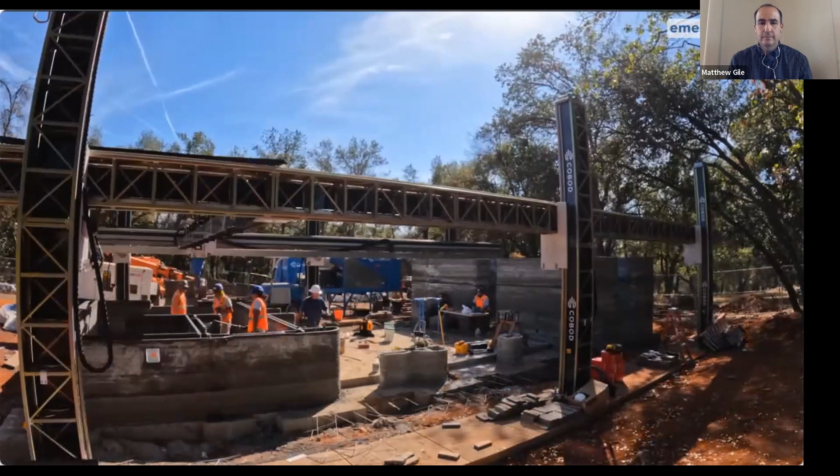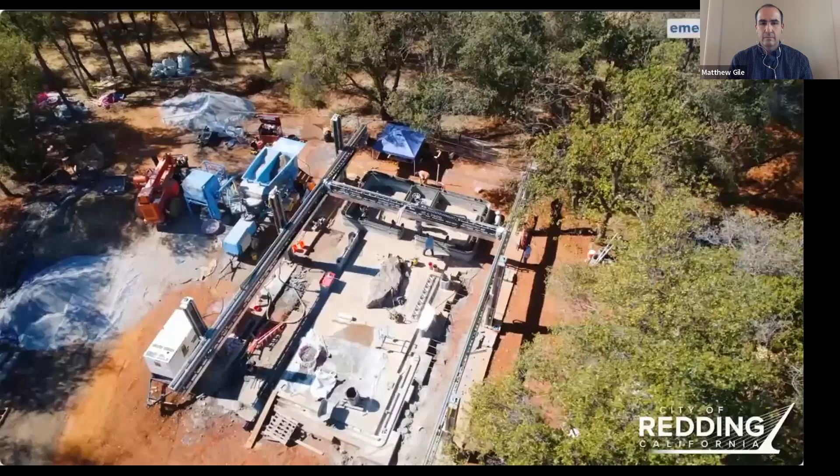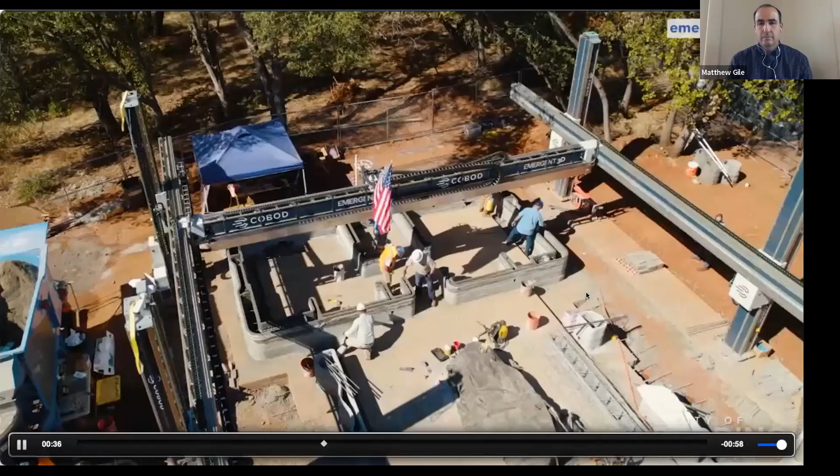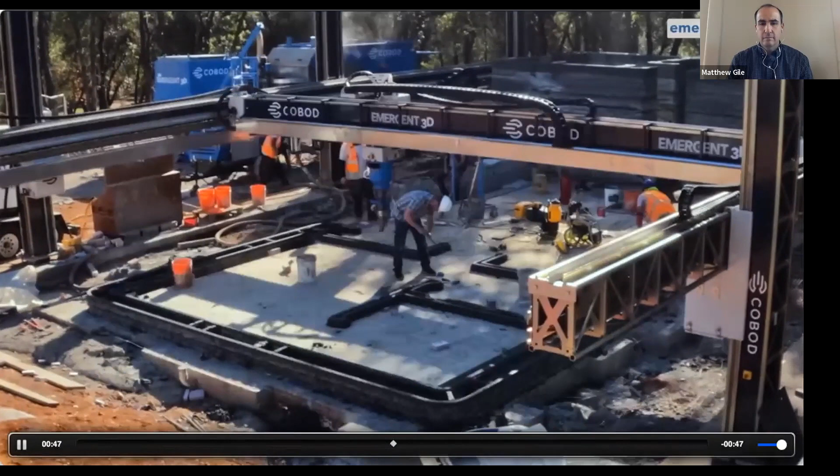I'm Matthew Gile. I'm the founder and chief visionary officer for Emergent 3D. Here is the culmination of 3 years of work. It's a site-built 3D printed house. And so this is the first in the state of California. 3D printing allows us to build these beautiful organic shapes and do it in a very affordable way. It's an opportunity to look at technology coming to everyday life. We're providing affordable housing for our community members. What community wouldn't want to be the first at building something that would benefit community members in such a real and concrete way? These houses will be marketed for families that are income qualified.

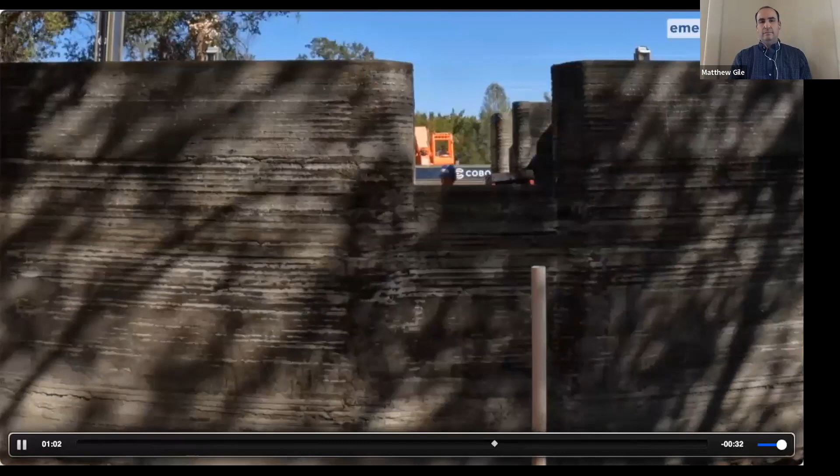How we can build a structure faster. That's one of the main advantages of the technology. You can basically customize your house the way you want it. We've got a $50 to $60 million capital expenditure program over the next 10 years. We are planning to put 50 to 60 of these printers to work all over the North State and the U.S. It's exciting, it's the new ways in building technology.

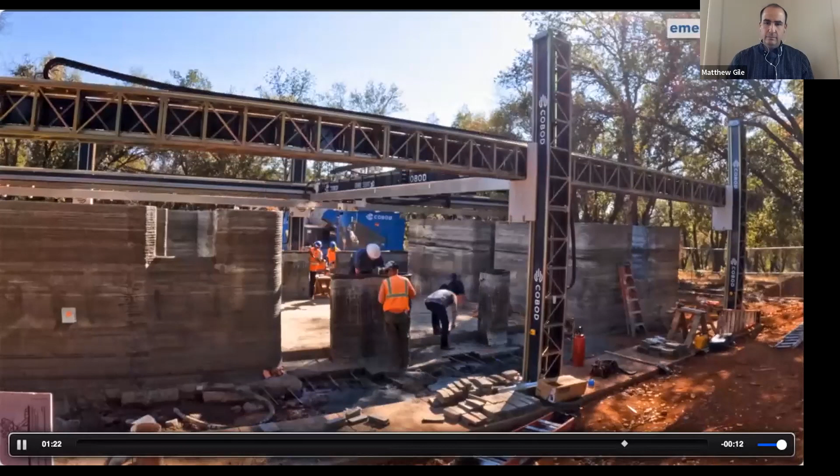So I know that I'm probably preaching to the choir here, but some of the main problems that we're facing in our housing crisis, and especially here in California, is our low supply of construction labor. One stat we like to share is for every 5 within the construction trades that are retiring, only 1 is coming in. So we are going to have by 2030 an 80% shortfall in our trained construction labor. And so this is a multi-decade crisis in the making.

And so automated construction robotics is going to be one of the solutions to help shore up that massive shortage in labor. Also, the cost of construction is an obvious one. And then within the workforce affordable housing sector, the cost savings versus the aesthetic design dilemma. With 3D printing, we truly can have on the design side our cake and eat it too. We don't have to forego a nice design to make it more cost effective.

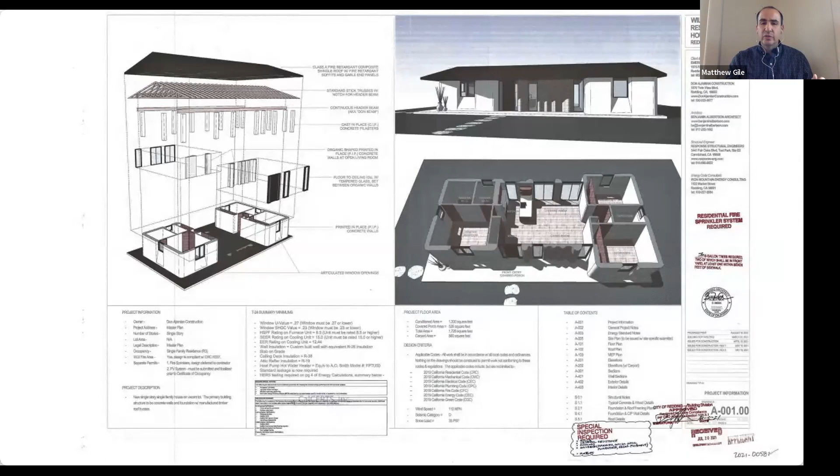What you're seeing here is what we've dubbed our wildfire restoration house. Originally, this was designed to address the Carr Fire recovery effort, and hence the name. It's a 1,200 square foot, 3-bedroom, 2-bath. You can see the coveted red stamp there in the lower right-hand corner. This is the first on-site 3D printed house design to be approved in the state of California. And then also the result, we printed the first on-site 3D printed house in California.

In partnership with the city of Redding and Access Home, the housing nonprofit, we are going to be printing a total of 6 of these homes here in Redding, and we have completed 4. And if it weren't for the atmospheric rivers that have been barraging our state, we would have already printed those, and these are moving forward with construction.

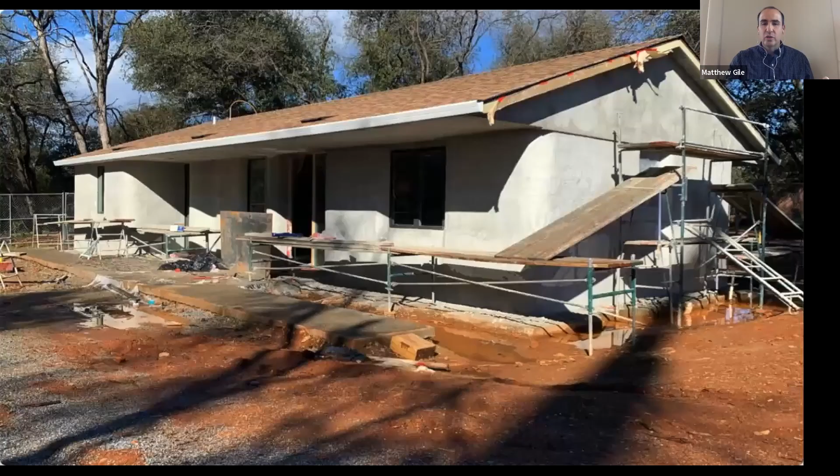This is the first one. This is in one of our parks called Enterprise Park for the city of Redding. This is going to be used for a park host. And so the city of Redding is providing subsidized housing for this caretaker to be on site, close the gate at night, and help the Parks and Rec services. And so this is, again, the first completed on-site 3D printed house in the state of California. And these are fresh off the presses, these images. Ben and I just went and took these pictures as of yesterday. And so it is rapidly nearing completion.

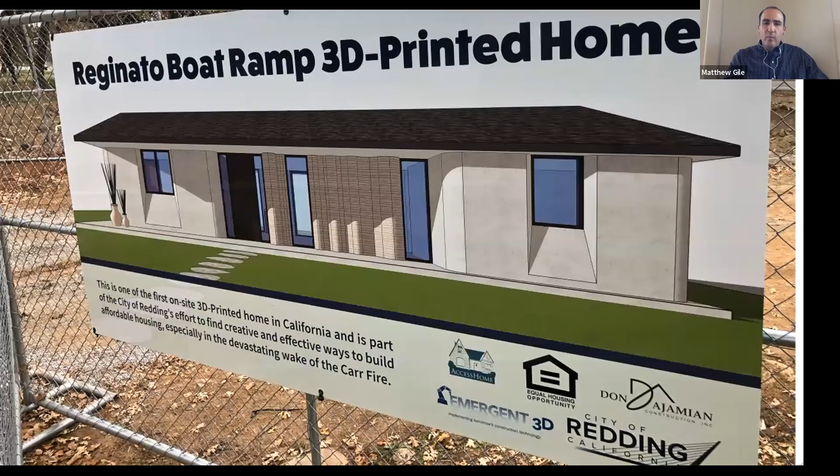This is the second one in another park here in Redding. The use case is going to be the same for a park host home. And this gives you a look at the stratified look before, on the other one where we did a skim coat, because finishes are incredibly important to us, and we want these to be desirable, livable homes. But just to kind of give you a snapshot of before that layer goes on.

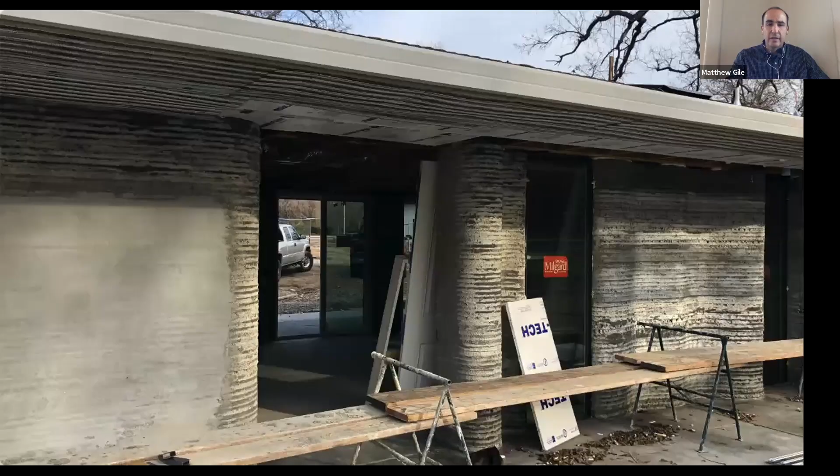And we had the honor to be able to print the first project in Los Angeles for the Woodbury University School of Architecture for their Department of Energy Solar Decathlon project. I think if I remember correctly, in the competition, there were about 20 universities competing, and Woodbury University won that competition. The premise was a net zero home, and their design was the only 3D printed design in the competition.

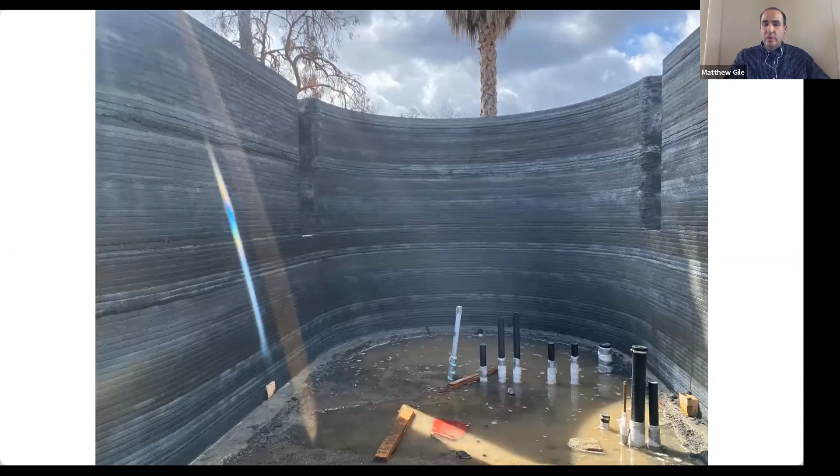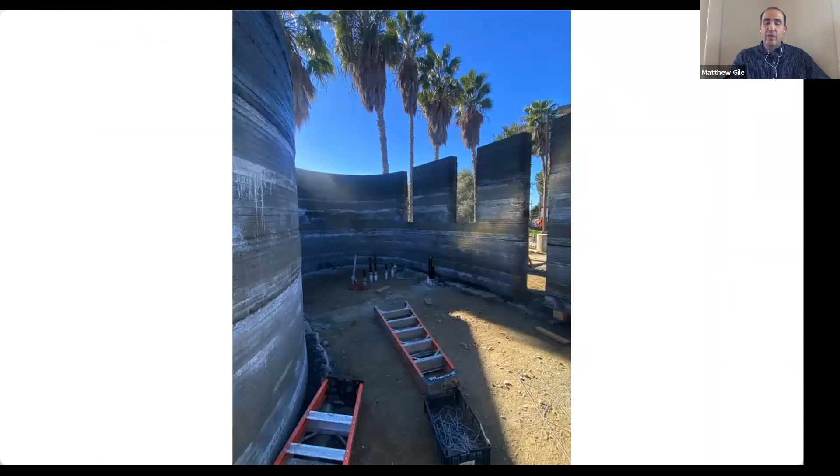And we went down, took our printer and printed it in 3 days. So it was a wonderful project to be a part of. And they are moving forward with construction, and I think they should be done with it in the next month or so. But just to kind of give you a look at the design there.

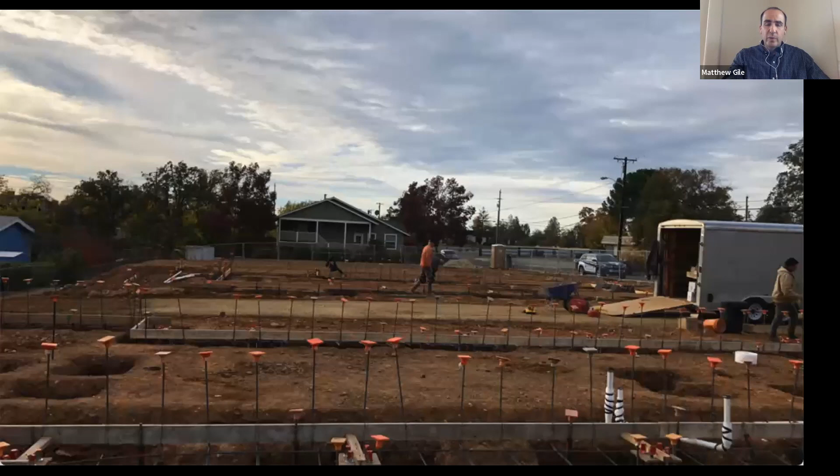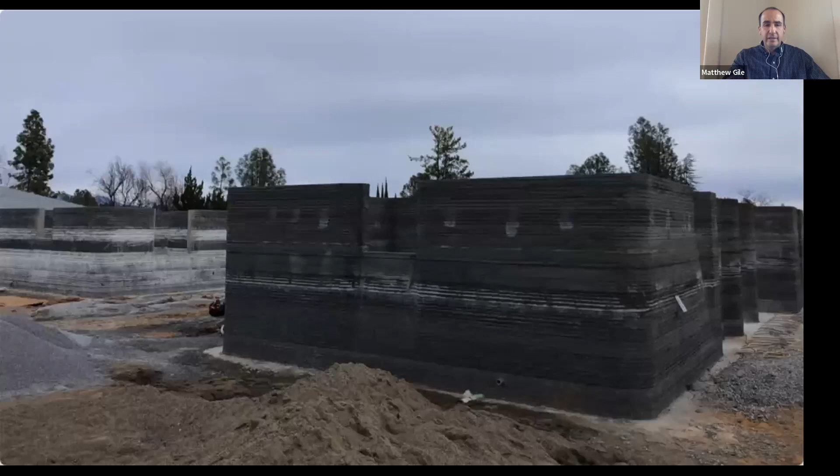Also here in Redding, this is in an affordable housing neighborhood. These are going to be 4 right in a row. And we have printed 2 of the 4 in this neighborhood. And again, if it weren't for the atmospheric rivers, we would have completed these 4. And so our company has moved out of the proof of concept phase and squarely into a full production phase.

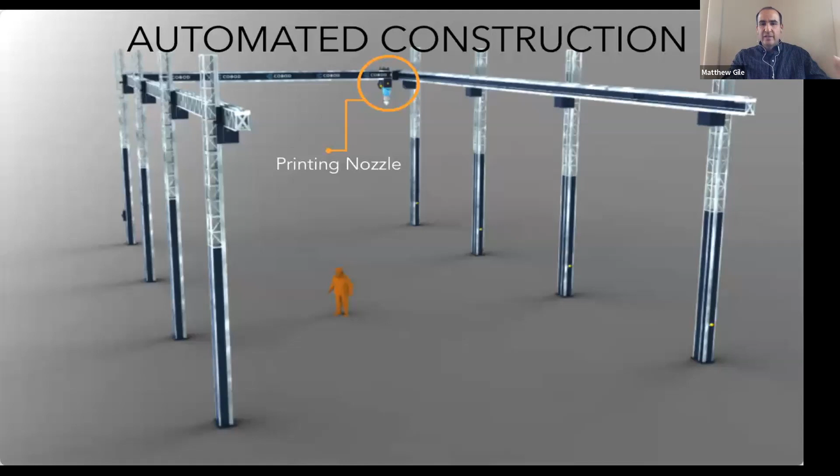Here's a look at the 3D printer itself at scale. This one in particular is a little bit larger than ours, but to give you an idea of it, we can print up to a 3,000 square foot single story with 1 setting, or a 6,000 square foot 2-story building with 1 setting of the printer. We can, as Ben will take us through, obviously print larger buildings, but with 1 setting.

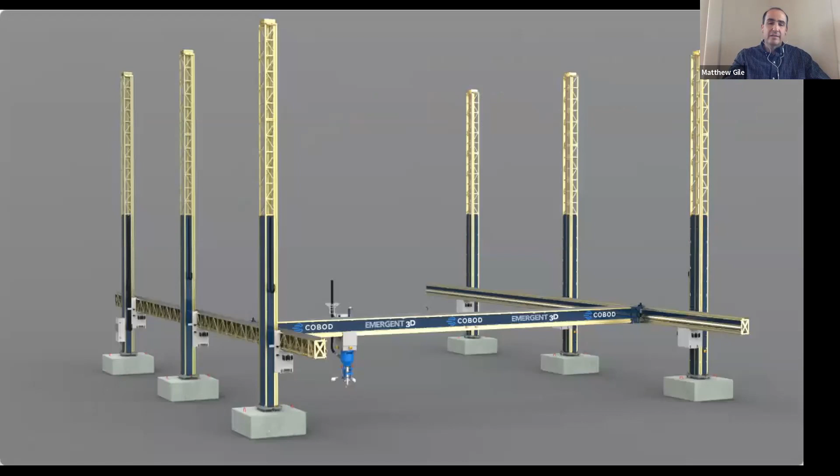That's the max print size of our printer, and this is the exact printer here. It is a modular system, so it can be scaled up or scaled down to match the scope and size of the project in the site. So that's one of the beauties of this technology, is that we're able to print on site and out in the field. We're not printing in a factory setting.

One of the important points for that is it has been identified by Freddie and Fannie as a site-built home, so our clients can get a traditional mortgage on it rather than it going into the modular or factory-built lending category. And then also State Farm has approved our 3D printed homes for their insurance policies, which is wonderful. So we're hoping to get many more insurance companies to recognize it, so that we can bring down the premiums for our clients.

And I'll just race through here. It brings a solution to the cost of construction because as long as we don't wrap the walls in stucco or in drywall, we save on that time and material. And we're batching right there on site. And also with our low supply of construction labor, it's attracting a younger generation because it's a tech construction job. And so we're really excited to be able to help in that regard.

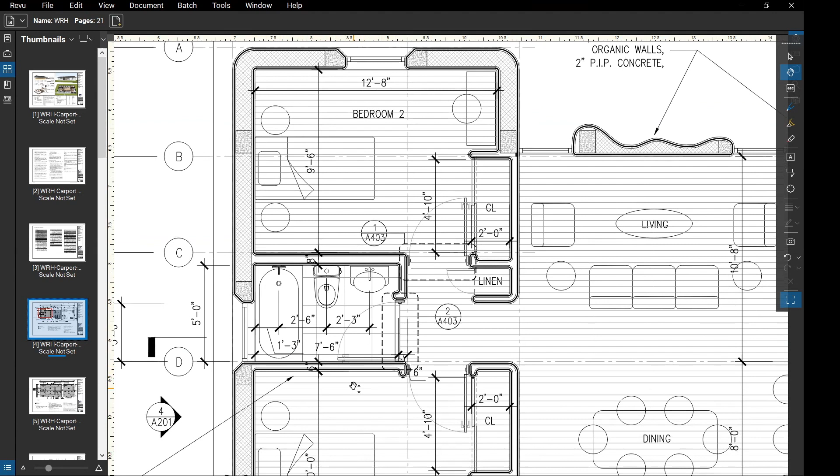Then as we go into the interior, we have just a typical 8-inch pipe shaft wall where we have plumbing, and then 6-inch walls for typical walls. And the printed wall is 2 inches thick. So you can see here that dark heavy line is the toolpath line. And I'll show you next our toolpath model that we create that then goes into the 3D printer.

And it's different if you have any experience with 3D printing. You have to create a volume in order for the 3D printer to print it. 3D concrete printing is different, where it reads a line. The toolpath wants to follow a path, essentially. So that black line is its path. And the thin line is the edge of the concrete. So you see the 2 inches.

So then at the 6-inch wall, we have a 2-inch cavity here with nothing inside because the wall can stand up by itself. We use simple wire bracing that is just laid down every few layers in order to tie the concrete together. Once the concrete sets for a few hours, it is super strong. It's not going anywhere. But just to make sure that the concrete doesn't move as it's getting layered, it's tied together with just simple metal wiring.

This is a little detail here at the door jamb, because when it prints, the tightest radius that we can do with the printer is 1 inch on the inside, and then again it's a 2-inch thick concrete element. So the outside curve is 3 inches. So we can't put a door jamb against that curve. So we made these little elements to have a flat portion to nail the door jamb to. The contractor liked that detail. It made it simpler for installation. And in the end, visually, it's kind of nice to have this accentuated door jamb or door threshold.

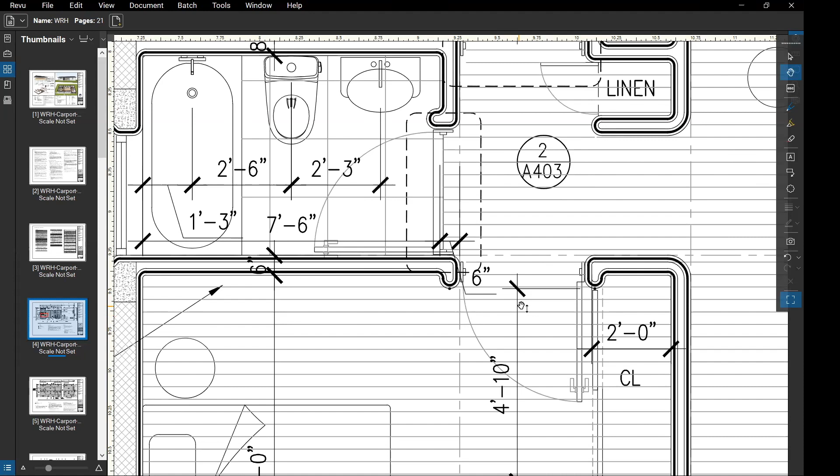I think I didn't mention it when we were looking at the 3D diagram, but in that 3D diagram from the beginning, these were the two white boxes on the sides where the bedrooms are, and then we have the organic walls in the middle. We did that to play with the printer and show off what it can do. But architecturally and contextually, we're building these in Redding, and if you've been to Redding, the trees here are really beautiful and distinctive. And now with the WUI requirements, where you can't really have trees so close to the house anymore, I thought it would be a nice detail to have these organic walls that reflect a grove of trees into the architectural design.

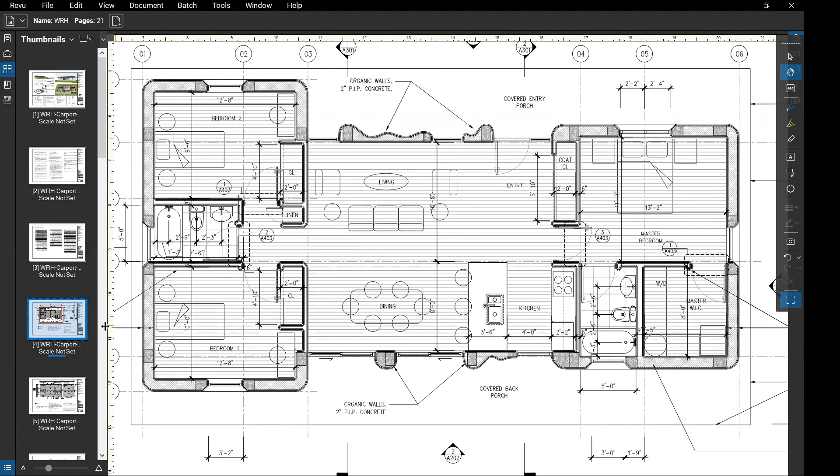The MEP drawing here, I wanted to point out because we get this question a lot. How do you do the outlets? How do you do the light switches? And in the end, it's quite simple. I'll show some construction photos at the end. They just set a box in as the printer is going along. They set a block out wherever there was going to be an outlet. And we played around with the idea, because you can control the 3D printer to stop at a certain point and then have a gap and then start again.

But the tediousness of that we felt was too much, and it was better just to have the guy on site be able to make that decision following the plan drawing, but be able to adjust it. So even though we're doing 3D printing, it's not replacing the workers on site. We still need the workers on site, the specialists, who know exactly where things need to go, and are able to work with the tool as part of the process.

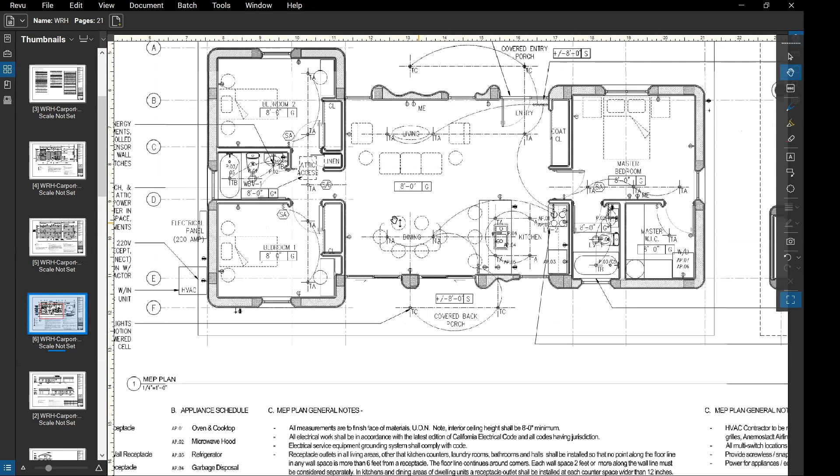And then it's just a typical drywall ceiling that's attached to the roof trusses, with downlights in that ceiling. So fairly simple. And then our typical elevations. We tried to push the envelope a little bit with our window detail, and we've got some photos to show that. We've got this 14-inch thick wall, and rather than having this big window sill and frame wrapping all the way around the window, we inset right here underneath the window and on the sides, so that we didn't need any additional windowsill. The window can sit right on top of the concrete and be attached top, bottom and sides.

And we learned through the process that because of the way the 3D printer works, when it prints, and you could see that in the photos and the videos, it's like squeezing out toothpaste. It kind of bulges out. It's not so clean and sharp, but you can use flaps on the side in order to get a really clean, sharp finish. And actually, the photos that Matt was showing from the Woodbury project, they used the flaps, and it turned out really nice and clean.

And we didn't use the flaps on the Wildfire Restoration House because of this window detail. So they've talked me into revising that window detail, because it's angled, the flaps would cut into the concrete as it's going along, and wouldn't look so nice. So in the end, we've just set the whole thing in. So rather than sloping up to meet the window, we just set it in here, so we can still achieve the same thing without needing the big windowsill. So it's all still a work in progress, and live and learn.

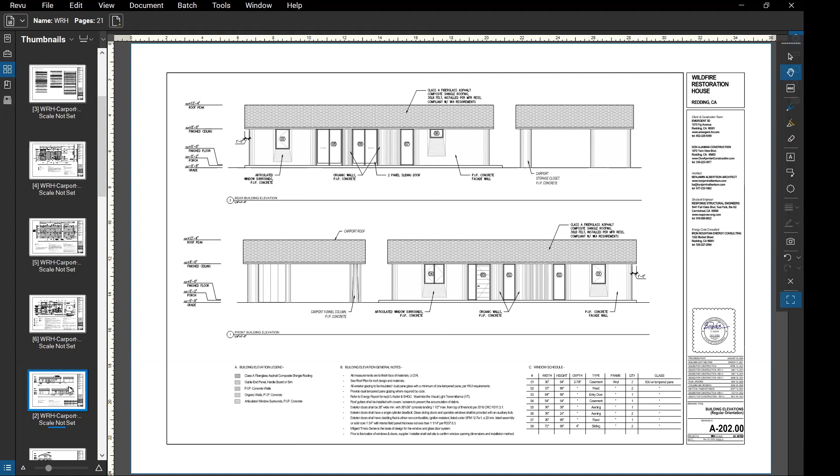Typical elevations, section drawings. I'll zoom in on some of these here. You can see the roof truss and how we buried the beam into the roof truss, just to let the concrete walls really be expressive.

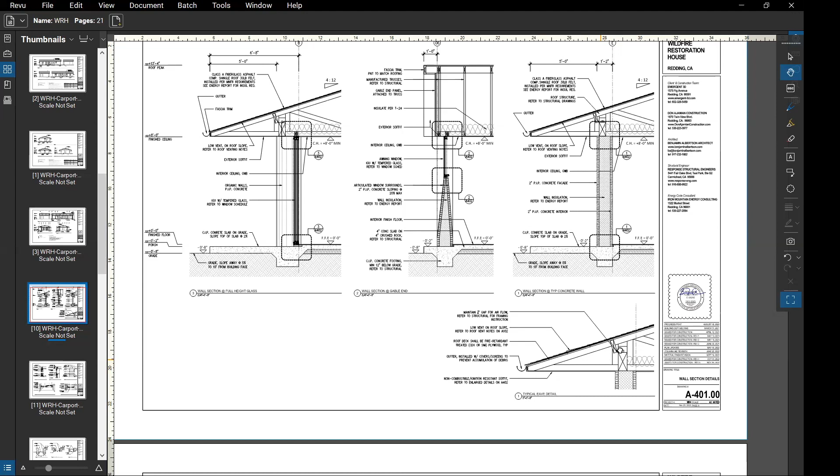In enlarged details, the windows and doors, we attach them right to the concrete. Again, we were wrestling with how much tolerance to give ourselves, because the printed wall is based completely on my toolpath model, which I'll show you here in a moment, which is kind of exciting as the architect. A lot of times we do the drawings, then we give it to the contractor, and we don't know exactly how they're going to make the wall or where the wall is going to go, or they call us out to the field and it's in the wrong spot.

But it's great, but it's also a bit nerve-wracking because if the wall is in the wrong spot, it's now our fault, and they can't move it very easily. So it is added stress and added responsibility, but I think it's great that we get to control that and work with the contractor to consider things like how much tolerance to give for windows. In the end, I think we only had a 1/4 of an inch tolerance, and it was totally fine because the print is very precise, and it looks quite clean in the final condition, not having to have an additional trim going around those windows, and they just caulked it right to it.

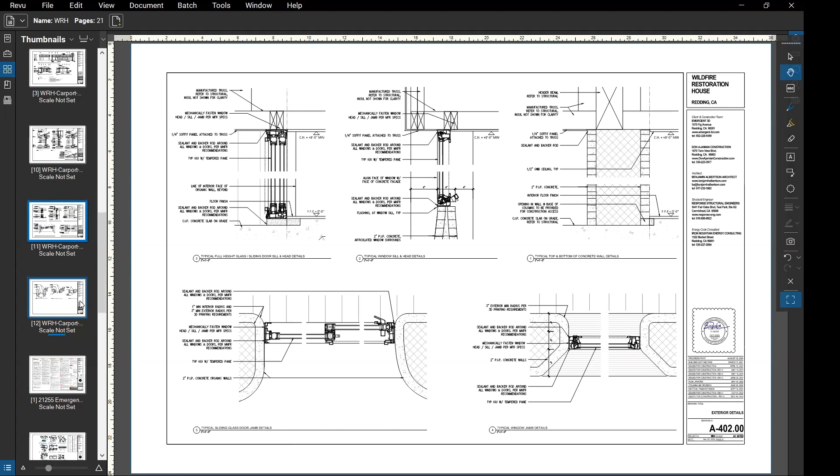And that's what's great too about this process of working together with Emergent 3D's team. They have a licensed contractor on their team, and I really see this as a design build process. As an architect, I couldn't do this design completely on my own. And I've learned a lot from the construction team from Emergent, and continue to learn. That's part of this whole process, is to continue to learn and make this better. And then we just did some enlarged interior details, showing the door jamb at those different wall conditions.

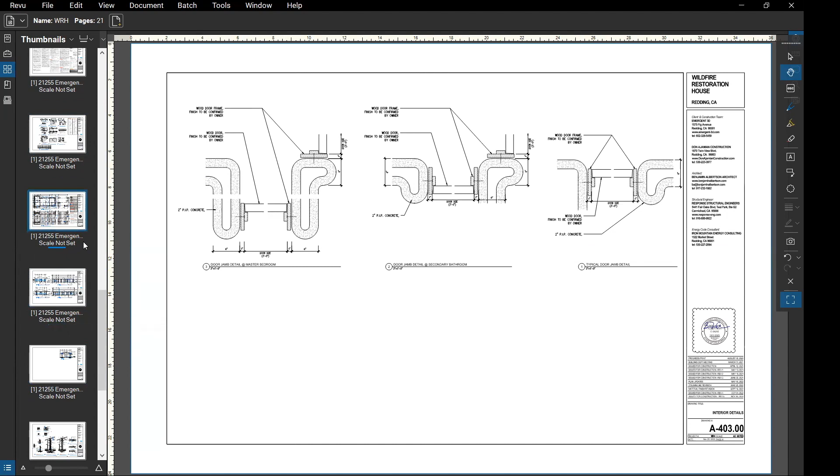I'm not going to spend too much time on the structural package. Todd Keeman is our structural engineer. He's based in Sacramento. He's a great structural engineer, and he's been with us from the beginning. Let me see if I can get his. Yeah, they're Response Structural Engineers in Sacramento, and I give a lot of credit to him to help us get through the building department.

Just to talk about that for a second. The building department review in the city of Redding took a long time. You saw that on my title block. There were five reviews back and forth. And on the architectural side, there wasn't anything too specific about the 3D printing. It was just mainly typical architectural questions and comments. But they really dug into the structural design, and Todd used to work in Redding, and so he knew a lot of the people in the building department and was able to meet with them face to face.

They had a lot of meetings, adjusted the drawings, and did a great job to design something that really made the city of Redding comfortable, because they are the first building department to approve this. Since then, as Matt was saying, we've gotten this approved in 3 other jurisdictions, and it was very quick and straightforward because the city of Redding had already gone through the process, and those notes and record were documented for other jurisdictions to be able to refer to.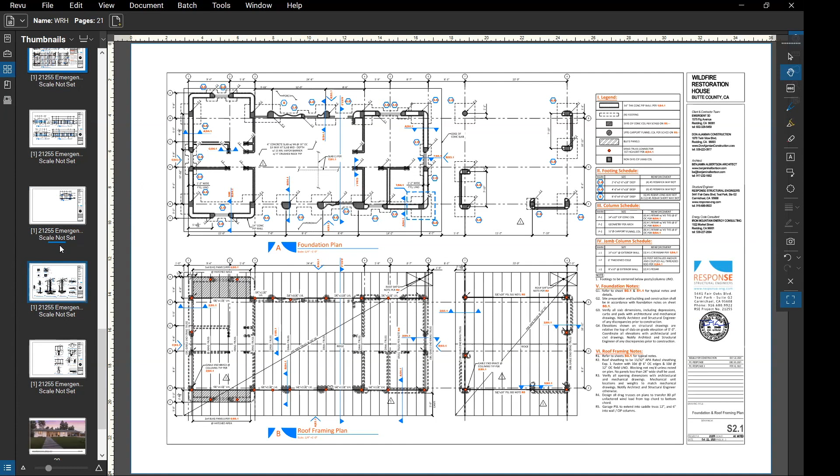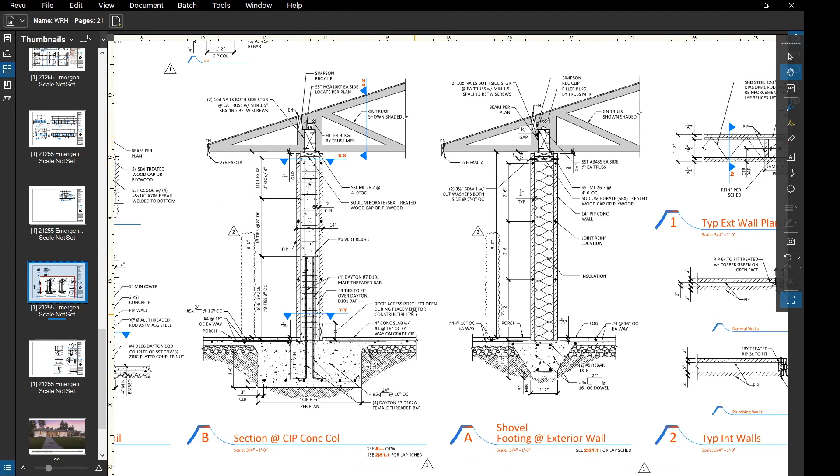I wanted to show this. I think this is a nice section detail, a bit more detailed than mine, that shows the 2 wall conditions, where we have the insulated wall where there's no pilaster and the beam going over the top. And then where we have the reinforced concrete pilaster and the beam is attaching to that. And very large foundations. It's a very durable and strong building, probably over-designed again because it's the first one, but it's a lot of incredible structural engineering.

And then I'm going to show you some construction photos, but before that, I'd just like to show what we were wanting it to look like. As you all know, when things are in construction, it never looks exactly as you're wanting it, and you're hoping that it does turn out. And we think that with the capability of the finishes, we will be able to achieve these things.

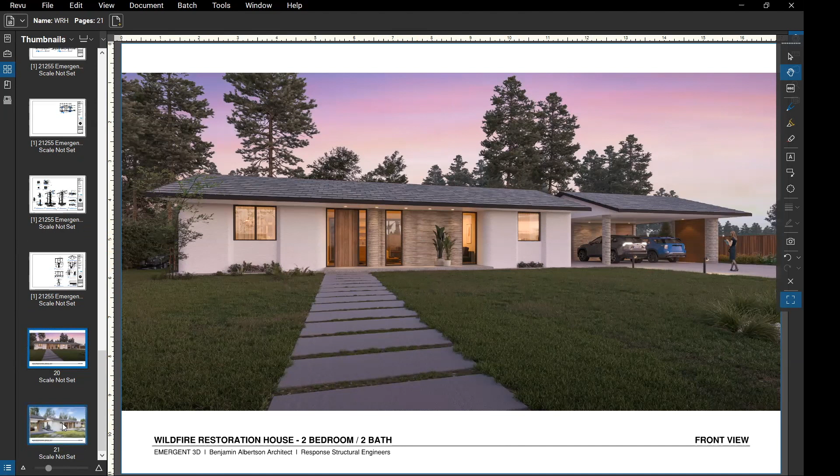So our design intent for this one is to do a smooth finish. We're going to plaster the walls on the two sides, the two white sides, and then let the middle organic walls remain a little bit rough and textured to show the history or the nature of the material, to expose that in certain places. And these are design intent renderings of the wildfire restoration house. So I'm going to stop share, and then reshare the photos.

Let's look at these. Matt had shown a few of these already, but I've got a few more interior photos that may be interesting. So this is the outside. This was the first one, as Matt had said, and so it was very rough. They've already started to plaster it, and they're not finished plastering it. There were some places where the wall texture had come out 1/4 of an inch or 1/2 an inch, as they're trying to get used to how the machine works.

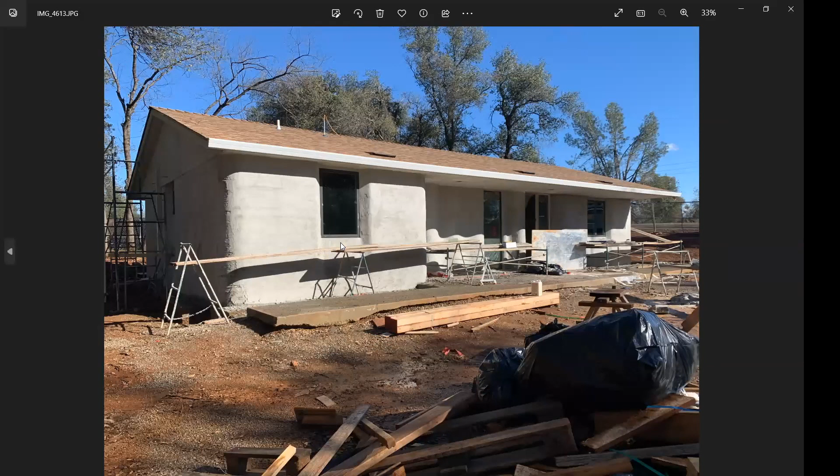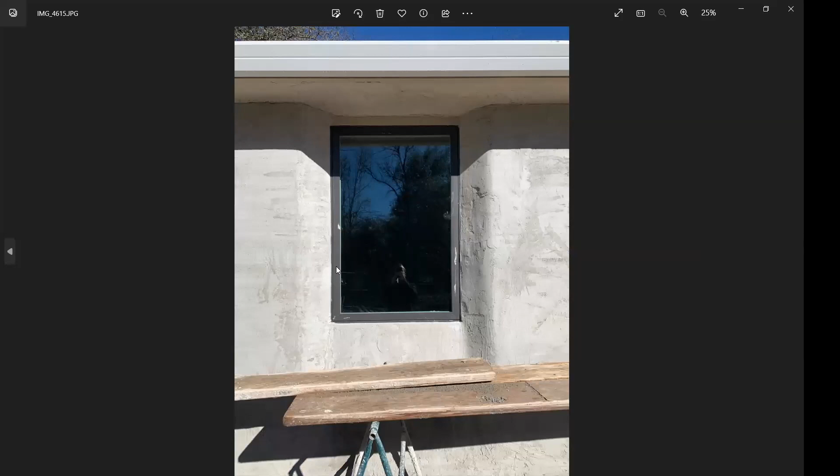So this one is a bit rougher, and I was saying that we're going to leave these organic walls textured, but because it was so rough, we did have to plaster it. We're hoping as we do this on the 3rd or 4th one, we'll be able to leave those fairly unplastered, unfinished. There we go. You can kind of see that inset window detail, how that curves in order to meet the window. We have no additional frame around that. There's the window. You can see how the light hits the curved wall.

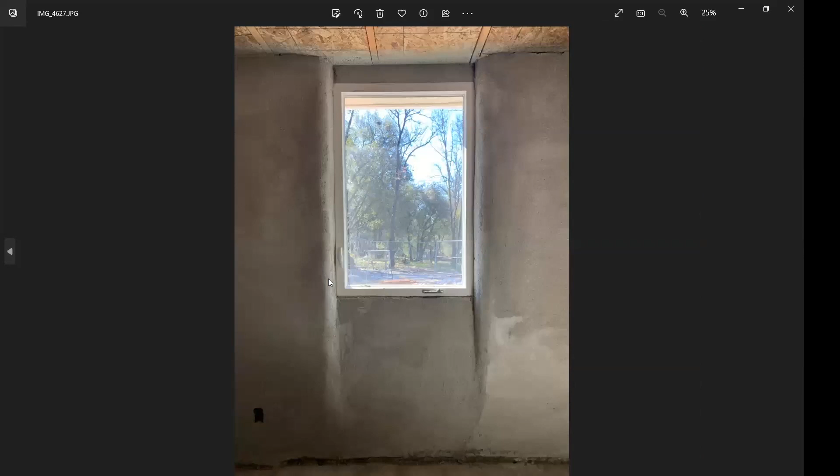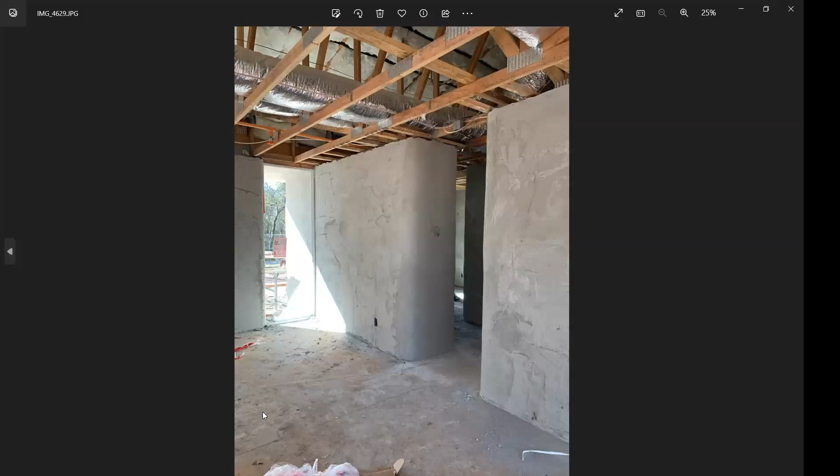Still a ways to go with it. We're going to plaster the ceilings here, plaster it smooth. You can see how rough that is. But again, this was the first one. As we're doing this more, it's getting much smoother and cleaner. And the window detail on the interior. Here you can see one of the outlets blocked out. They just set the outlet box right in as the printer was going. Another outlet there, and then some curved walls on the interior, so you can see how the trusses run across, and we just have the ducting running up through the ceiling there.

So I see we're running short on time. Let's see. I may just skip the church. Maybe I'll just quickly show that. We need to wrap this up in a couple minutes. Go back.

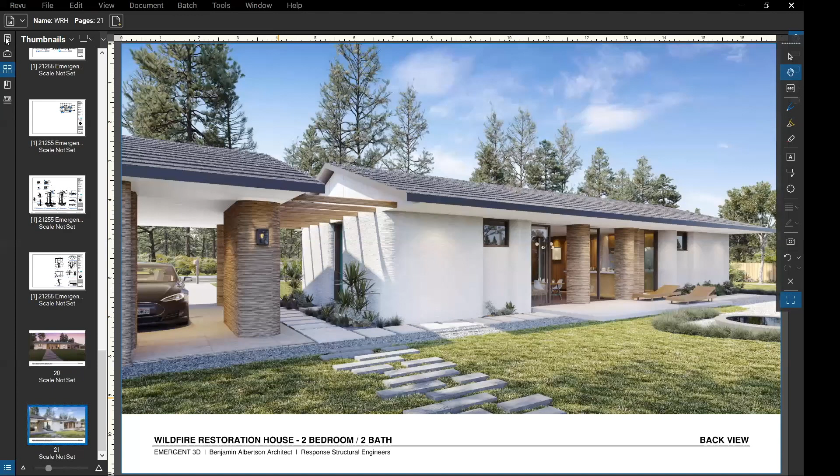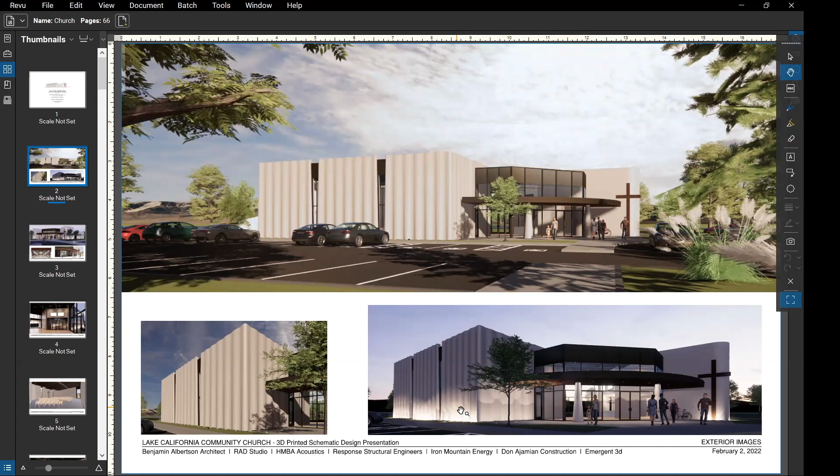So maybe just one thing to point out, the exciting thing with this church project that we're doing is that using the 3D printer, we can print shapes into the walls. And so the idea is that we would print the correct acoustical deflective shape on the interior inside the sanctuary and the classrooms. We carried that shape onto the outside as well in order to create this sort of curtain-like appearance on the exterior.

But here you can see, when you look into the sanctuary, it's a tighter radius. We worked with an acoustical engineer, David Harvey, who's a brilliant acoustical engineer. I'm honored that he took on this small project with us, and he gave us the right shape in order to create acoustical deflection for the sound to bounce out.

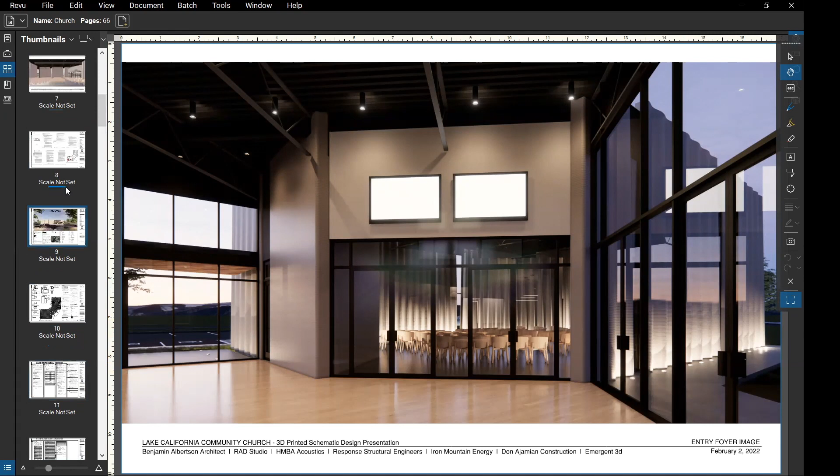And then we had Acousta deck on the ceiling, and with the chairs, and we'll have some drapes at key locations in order to properly absorb the sound. And he did a full acoustical analysis and report and study in order to confirm those shapes. And I'll just quickly show the floor plan of this one.

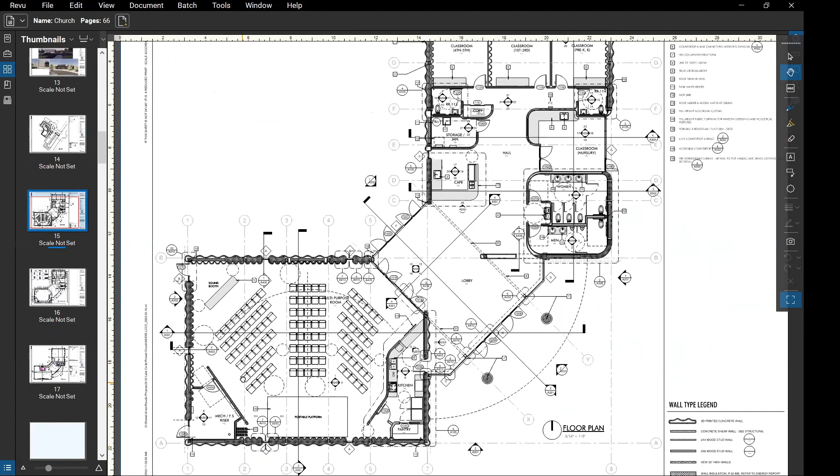And so again, this one is building department approved in Tehama County. We're quite excited about that. As with all projects, there's a bit of a budget issue or process that they're going through right now, so they haven't started construction yet. But it's not because of the 3D printing that's adding extra cost. We're able to do these kind of things with the shapes of the walls, and it's not adding additional cost. We've had to add some additional windows, and those kind of things are adding the cost. It's not the concrete walls.

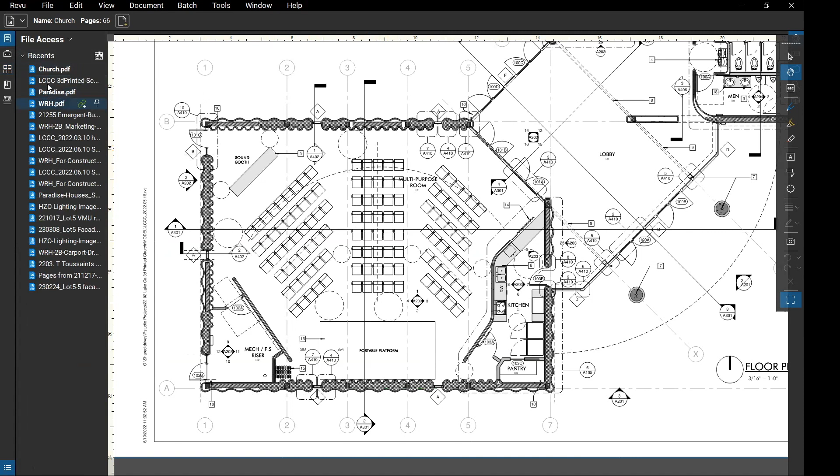And then lastly, just a really quick, this is what's on the boards right now. We're working on some new house designs in Paradise to help rebuild the town. It's a huge problem there right now. If you've been there recently, there's really a lot of need for new housing solutions there.

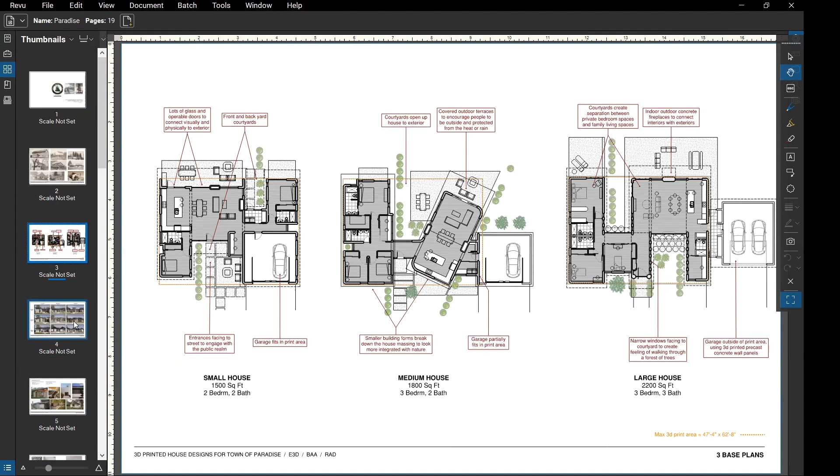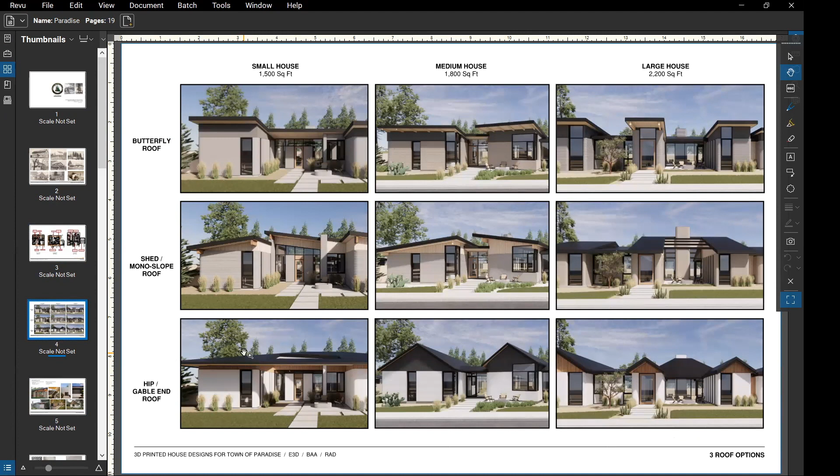So we've done three house designs, 3 floor plans, a small, medium, and a large. And we gave each one a different rooftop. Each one has a different haircut in order to try to create variety, so that it doesn't feel like this whole city of, not that we're going to rebuild the whole city, but ideally, if we can rebuild a bunch of these, that they all don't look the same.

And one thing I wanted to mention as I wrap this up is just the finish options. We always like to use the natural materials, stones, woods, and that adds cost to the project. And with a 3D printer, it'd be a shame to 3D print the walls and then add a cladding on top of it. So what's exciting to me is to think about what we can do with a 3D printer to create texture. When you look at some of these images, I think it's the texture that people like, not necessarily just the material.

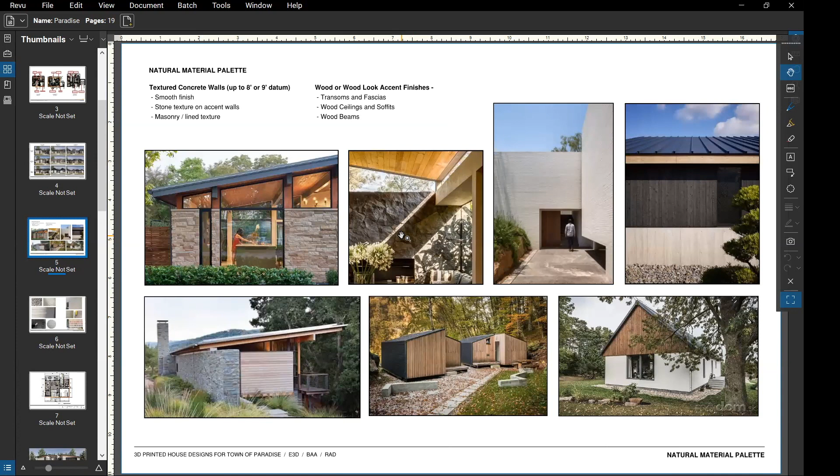And so being able to create that texture with a 3D print head, or after the fact with a trowel to trowel the material in order to give it a texture. And then also with colors too. There's some pretty exciting things that other 3D printing companies are doing where they're mixing colors into the walls, where you get this kind of rammed earth appearance. Or even if we just do one color and that color is through and through, you don't have to worry about painting. That seems quite exciting.

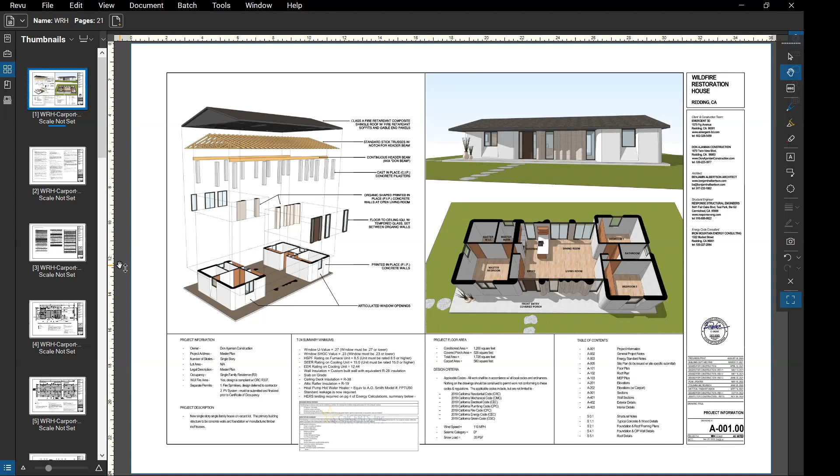Well, why don't I just start? The first question I had was, while you were talking about the insulation in there, what was the R value you were able to achieve in the prototype home? So at the insulated wall portion, we have to be a little careful how to say it. It sounds nicer than it is. At the 10-inch portion, it's over R40. But when you do the blended number, where you take out the pilasters, then it's about an R28. Okay.

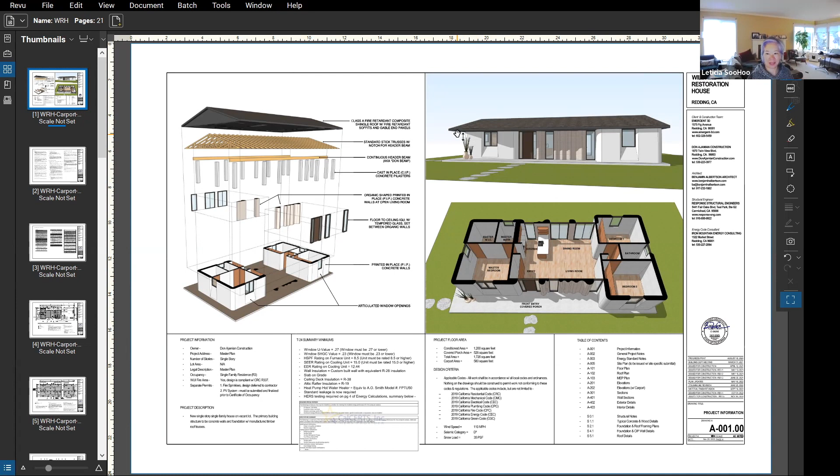Let's see. What material is in that 1/4-inch soffit panel? Leticia asked this question. Leticia, do you know what soffit panel she's talking about? In the ceiling? Yeah, when I saw some wall detail, it calls out a 1/4 inch soffit panel. I'm just curious what it is. Yeah, and I think in the end, we're not leaving it as a finished panel. We'll just have a plywood panel, and there's stuccoing over it. Okay.

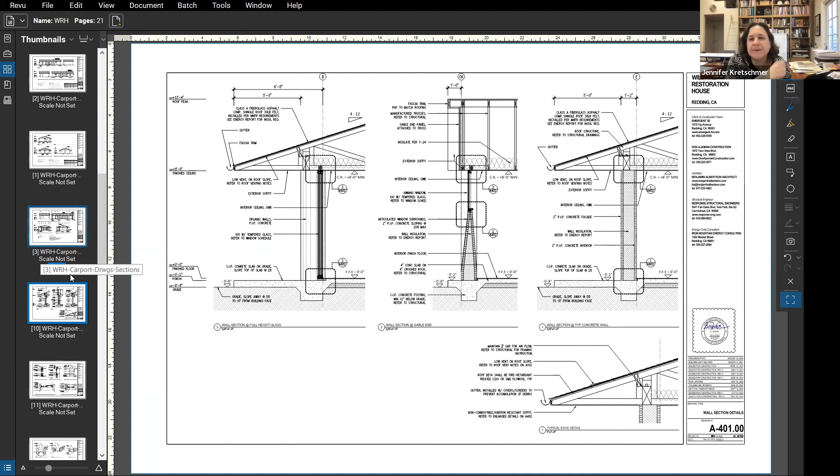So what kind of access to the property is needed for the printer to work, and what sort of support is also needed for the printer due to its weight at the property? It's a good question. Yeah, Matt, do you want to talk about that in terms of how the printer is set up on site? Sure.

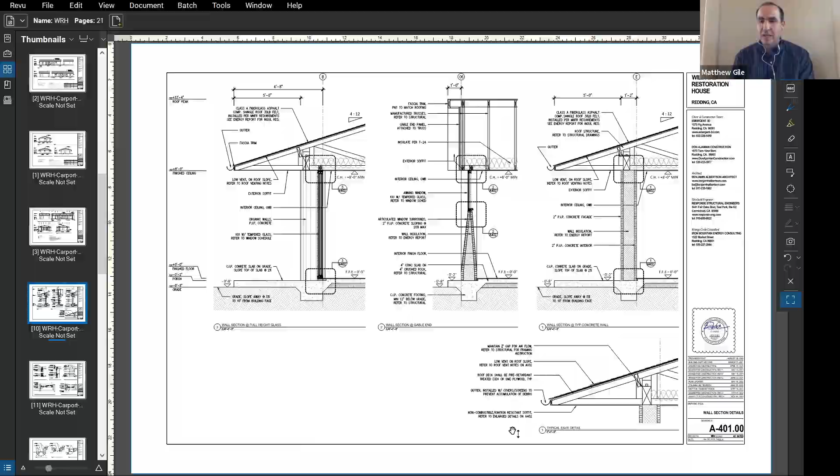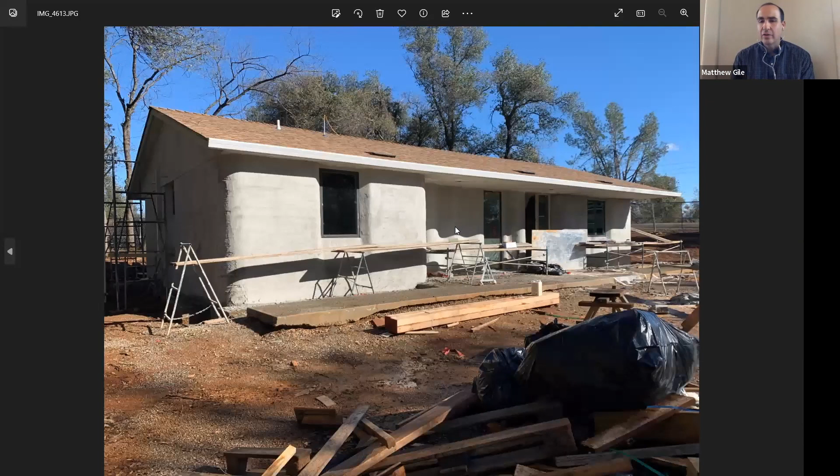We've gotten a lot of questions on whether ADUs would be a good fit, and it depends if we have direct access back, say it's in a backyard or that type of thing. The printer is modular, so we can pack it down. But if we can't get a telehandler or reach it with a crane, then that makes it prohibitive for us to do a backyard ADU or that type of thing. So, but the modular nature of the 3D printer does open up the scale and size of the project.

It would have to be a case by case basis, but we need direct access to where it's going to be. So is that what that sidewalk is that we're seeing? Exactly. Correct. Yeah. And there's another one on the other side. So it does need some space around it in order to set that up.

All right. Do you think 3D printing will work on a hillside site? It's a good question. Yes, the towers, the four legs or 6 legs that it sits on, you can have them at different heights. So it can work on a slope, but it's typically simpler. We've been looking at a few projects and starting to work on the design where it's on a terrace site, and we've been finding that it's simpler to just level it out in order to set it up. But it is possible to have it on sloped ground where the printer is sort of straddling 2 different elevations.

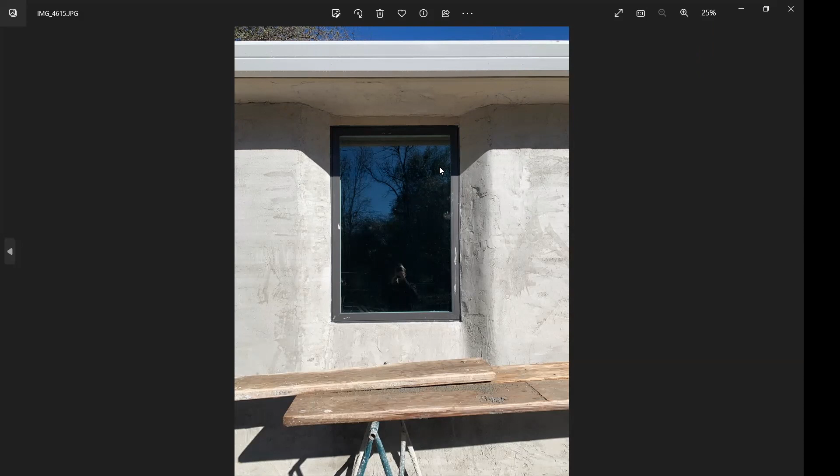That sounds like an entire hour-long session, Jason. If you'd like to help us do that analysis, give me a call. Yeah, I mean, it's a great question. So, yeah. Well, on a high level, can you answer that? So I got to clarify.

So just a quick nugget: you said there's a 3,000 square foot 1-story, or a 6,000 square foot 2-story. What's a general unit cost someone would expect at this point? For the printed portion, or for the whole house? Overall project. You said it's pretty comparable to normal construction these days, so what would that range be? I think it really would depend on the location. What we're finding here in Redding, Shasta County, is like $350 a square foot.

Okay. Is it possible to have change orders? Say if you need to relocate an electrical outlet or relocate an interior wall? Great architect question. Something we try to do is to foresee that. On this house, all the walls are printed, and I don't think I have a photo of it, but on the wet walls, what we ended up doing is leaving portions, like where the plumbing is going in for the shower, the vanity, or the toilet. We left parts of the wall open, not printed.

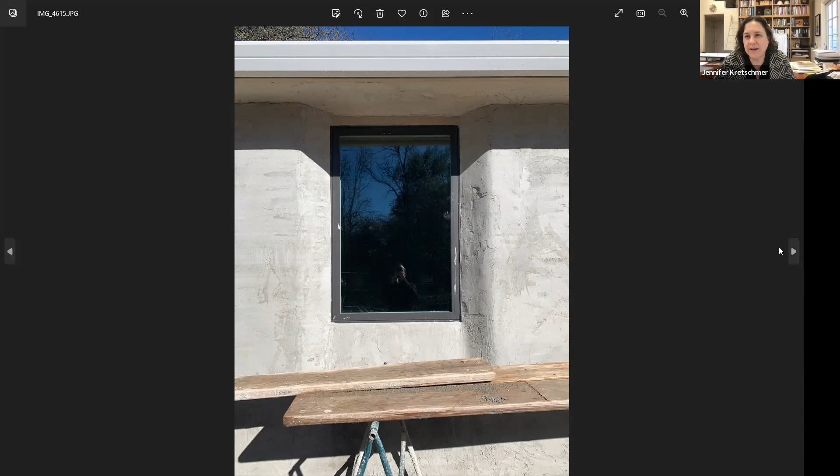All right. Well, thank you so much, Matthew and Benjamin, for presenting this exciting new technology for us. I think all of us architects want to learn more about it. I personally hope this is less of a fad and more of a direct change in the future. Even if it's not concrete, maybe we're looking at other materials to 3D print. It's happening with our architectural models. Very few people are building them by hand, and more are doing them in 3D printing. So now we're looking at a grander scale.